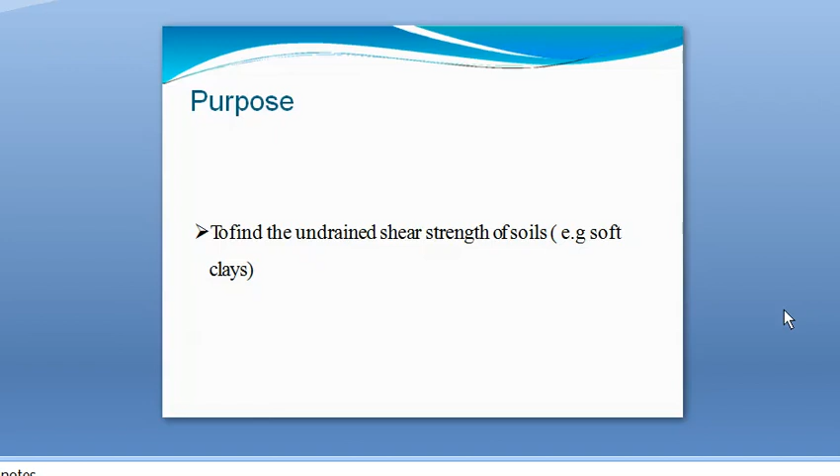So the aim of vane shear test is to find out the undrained shear strength of the soil, and the vane shear test is usually conducted in soft clays. Okay. As we have discussed in the last lecture, shear experiments can be conducted in different conditions, that is drained condition or undrained condition. Like that, this vane shear test also can be conducted in drained condition and undrained condition.

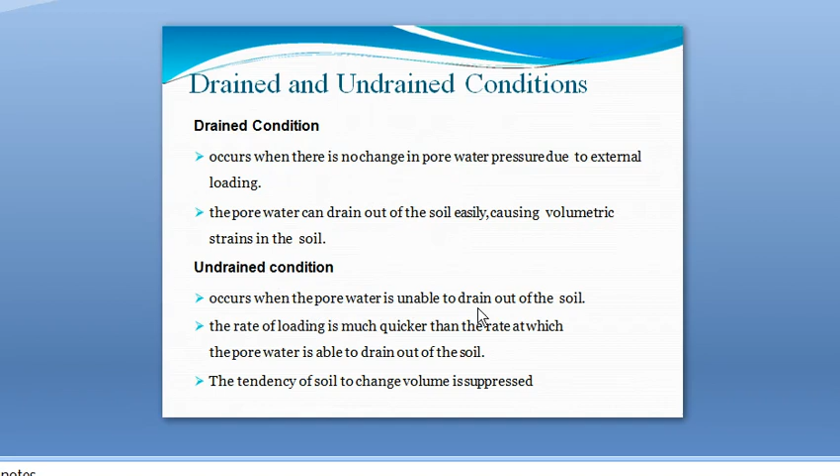If it is conducted in drained condition, there will not be any change in pore water pressure, and the pore water can drain out of the soil easily. So there will be volumetric strains in the soil. There will be passage of water, so there will not be any change in pore water pressure. And in the undrained condition, the pore water is unable to drain out of the soil, so there will not be any volume change.

This is the vane shear apparatus, and it consists of a vertical steel rod having four thin stainless steel blades, and these blades are known as vanes. That is, this vane shear apparatus consists of a rod. There will be a central rod, and this rod is attached with four vanes. So it is known as vane shear test.

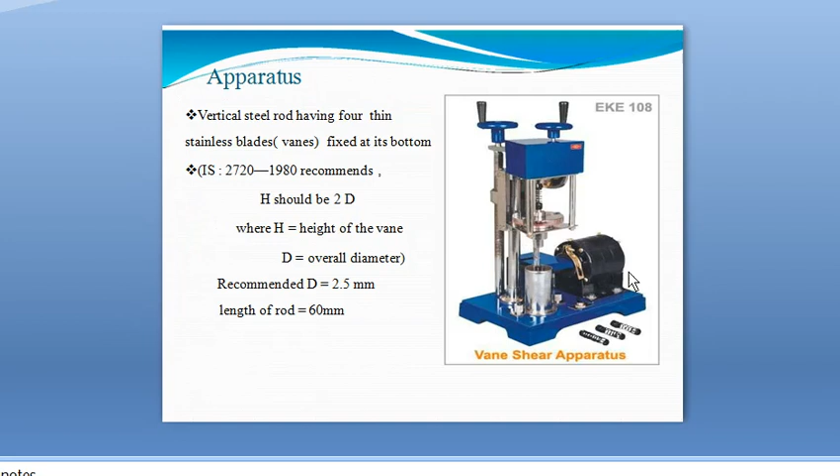These are vanes. So there will be four vanes attached with the central vertical steel rod having four thin stainless blades or vanes fixed at its bottom, and its dimension is height should be 2 times diameter. Okay, and usually recommended diameter is 2.5 mm, and length of the rod is 60 mm. This is the vane shear apparatus description. This figure shows the vane shear apparatus. This is the central rod, 60 mm height central rod, and these are four vanes or blades.

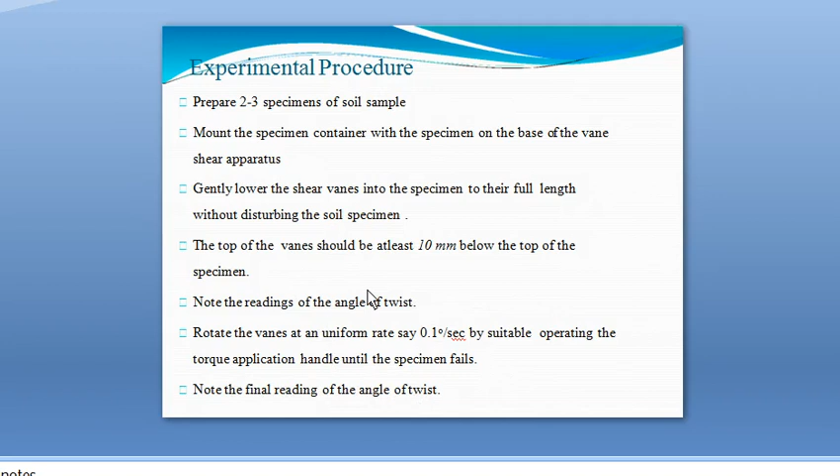So this is the experiment procedure: we are preparing the soil sample, and it is put on the vane shear apparatus, and we are lowering the rod with vanes, and applying the torque at a rate of 0.1 degree per second, and the torque application is continued till the soil fails, and we are noting the angle of twist or torque at which soil fails, and that is the reading of vane shear test.

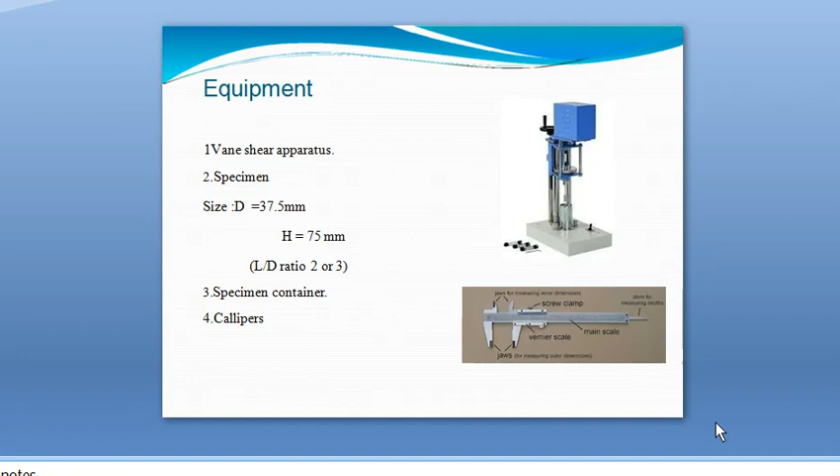Okay, so I have told that here we are noting down the torque, T. We are getting the torque from the vane shear apparatus, and by using this torque value we can calculate shear strength. Actually, we have to calculate the shear strength of the soil, and there is an equation connecting shear strength and torque.

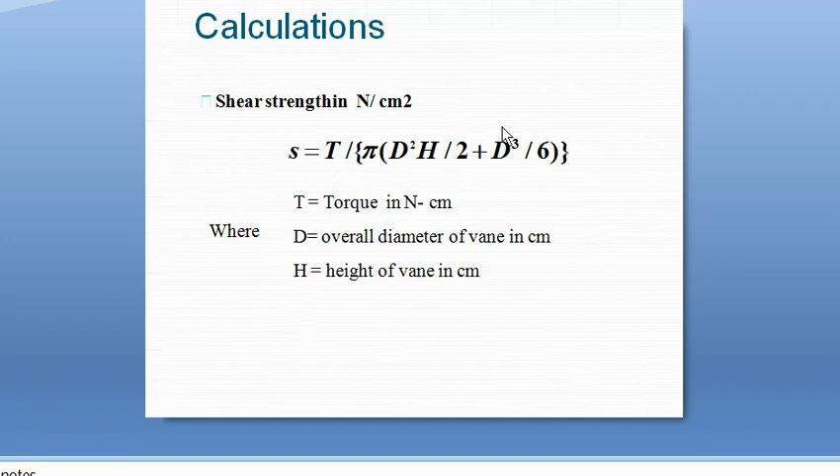That is, shear strength S is equal to T divided by pi into (D²H/2 + D³/6), where T is the torque in Newton centimeter, D is the overall diameter of vanes in centimeter, and H is the height of the vanes. Usually the height will be 2 times the diameter. So by putting the torque value and the dimensions in this equation, you can find out the shear strength of the soil. From this, we can also find out the sensitivity of soil.

We have discussed what is sensitivity. Sensitivity means the easiness with which soil can be remolded, or the loss in strength due to remolding. For that, after the initial test, the vane is rotated rapidly through several revolutions such that the soil becomes remolded. So we can find out the remolded shear strength. The first will be undisturbed shear strength, the second remolded shear strength, and by taking the ratio we can find out sensitivity. So from the vane shear test we can find out the sensitivity of the soil also.

Let's just do one problem based on this. Question is, a shear vane of 7.5 centimeter diameter and 11 centimeter length was used to measure the shear strength of a soft clay. If a torque of 600 Newton meter was required to shear the soil, calculate the shear strength. The vane was then rotated rapidly to cause remolding of the soil. The torque required in the remolded state was 200 Newton meter. Determine the sensitivity of the soil. Here we have to calculate the initial shear strength and also sensitivity.

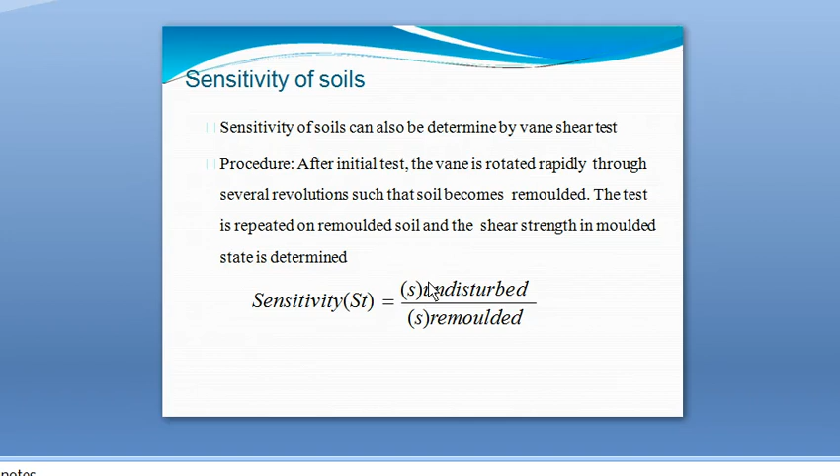So what is sensitivity? Sensitivity is the shear strength in undisturbed state divided by shear strength in remolded state. In the case of UCC test, we have written the equation as sensitivity is the unconfined strength in the undisturbed condition divided by unconfined strength in remolded, that is qu undisturbed divided by qu remolded. Here it is shear strength undisturbed divided by shear strength remolded. So we obtained sensitivity as 3. This is the procedure.

So, up to this lecture, we have discussed all the experiments to find out the shear strength of the soil. So, just go through the textbook and read the experiments again.